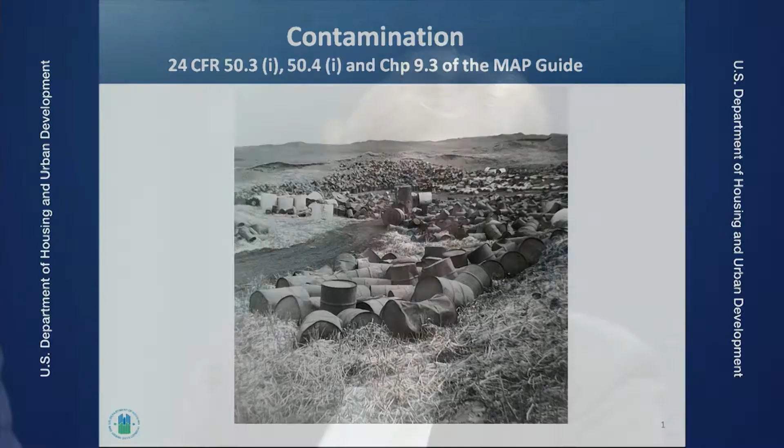Okay, I'm going to provide you with an overview of our contamination policy, Part 50.3(i) and 50.4(i), and Chapter 9 of the MAP Guide. I want to say that this area of environmental review is one of the most technical areas that we have to deal with. It often involves a level of high-end expertise in environmental science and engineering, and it's not something that usually can be addressed by just one person. You normally would have to have a team of people involved in really extensive site contamination issues.

So HUD site contamination policy is that all properties for use in HUD programs be free of hazardous materials, contamination, toxic substances, gases, radioactive substances where the hazard could affect the health and safety of the intended occupants or affect the intended use of the property. And our goal here is to protect the health and safety of people who receive HUD assistance, and the utilization of the property that we plan to use it for. In the multifamily housing context, the contamination standard applies to all housing projects except for 223A7, which is categorically excluded, not subject to.

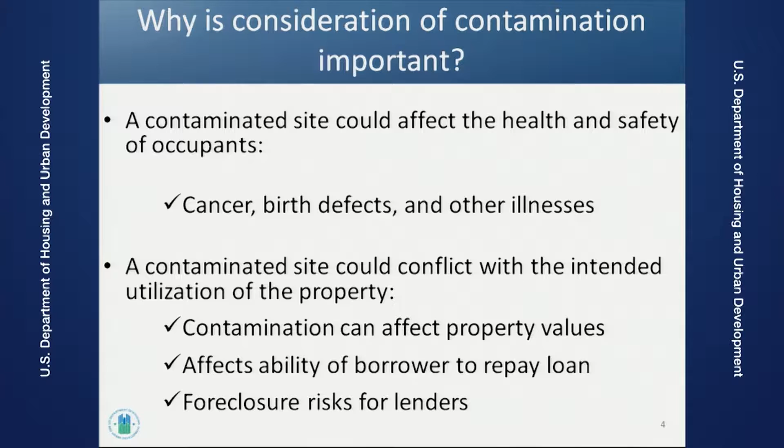Many people often ask us, why do we need to worry about contamination? One of the major reasons is that we need to make sure the occupants and users of HUD assistance are safe. We also need to make sure that the project itself is viable. We want to make sure that site contamination doesn't affect property values, that the borrower's ability to repay a loan isn't affected by a site contamination that wasn't identified before HUD issued the loan. And we want to make sure that HUD doesn't suffer financial risk from foreclosures.

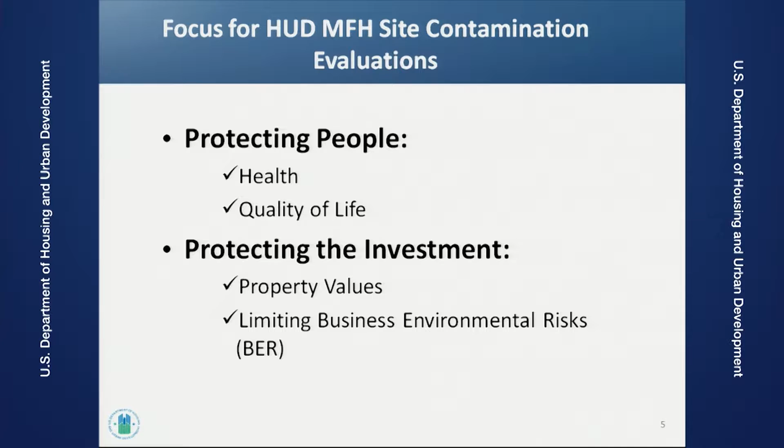So again, the aim of our site contamination policy is to protect people, both their health and quality of life, and to protect the investment, property values, and also limiting business environmental risks to HUD.

Many of you may be familiar with the Love Canal example. This is one of the early cases of extensive site contamination that was covered in the press. I know when I went to work at EPA in the early 1980s, this was a really big deal. In this case, a housing development had been put on a place where the Hooker Chemical Corporation had operated since 1949, and they were producing chemicals, storing the chemicals in containers, and put it in a canal. That's why it's called Love Canal.

The canal was buried, covered over with dirt, and was later leased to the school board, and the housing site was developed on that as well as schools and other infrastructure. As time went on, the occupants of the housing noticed a cancer cluster in the area, and found that the site was contaminated not only with vapors coming up through basements, but actual chemicals were coming up through basements of people's homes.

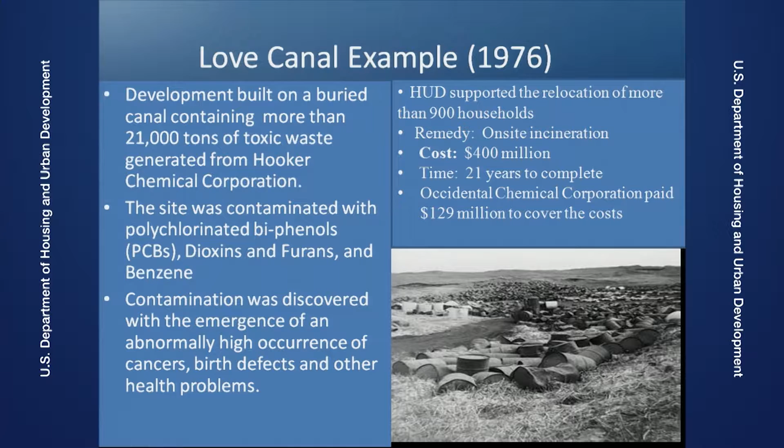The cleanup of this site was extensive. It involved more than 900 families. HUD supported the relocation of those families. The cost of remediation was over $400 million. It took 21 years to complete. And Occidental Chemical Corporation, who bought the property later and was one of the previous owners, paid $129 million to cover the cost. Another example is the Brio Superfund site in Harris County, Texas.

There was a huge litigation, and in 1992 there was a settlement, one of the highest, most costly damage settlements in history, of $207 million that the developer and 6 chemical companies had to pay. EPA was really never able to remediate the site because of the cost of it, and so basically the site is contained, areas of it are capped, it's fenced off, and as you can see, it's now vacant land.

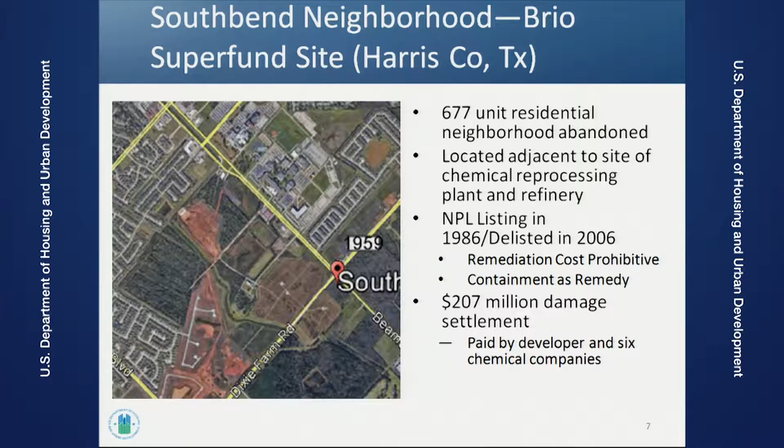Environmental liability is something that comes to mind with site contamination. We have National Environmental Policy Act liability. If you don't comply with site contamination in the proper way and you miss something during the environmental review process, there can be litigation against HUD on the Part 50 review, and HUD would have to go back and improve its environmental review, which is the least of our worries.

If, for example, we don't evaluate a site thoroughly and we happen to allow a project that has site contamination that involves low-income and minority populations, we can end up with a Title VI complaint. And we can also be subject to court-awarded damages for health, loss of income, loss of property values, much like the South Bend neighborhood case.

And then there's cleanup liability. Even if EPA doesn't come after the property owner for cleanup under Superfund, if a property owner acquires a contaminated site without properly evaluating for contamination, and the site is later found to be contaminated, they have to clean it up. So either it just has to sit there, or they have to come up with the money to clean it up, and the cleanup costs typically are in the millions of dollars.

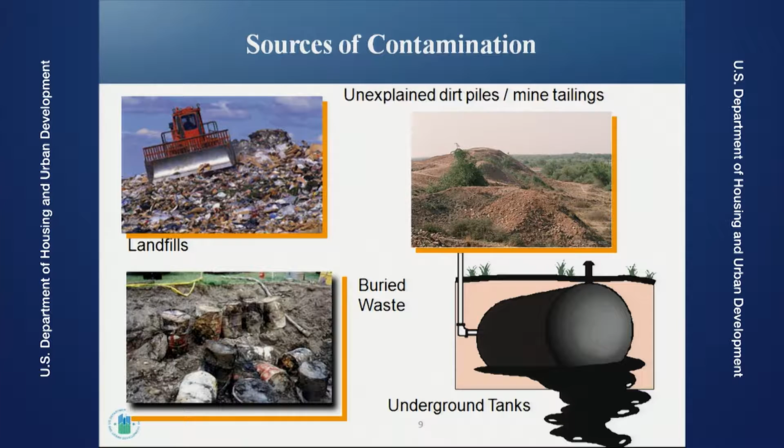So the contamination sources that we are normally concerned with are landfills, buried waste, as in the case of Love Canal. Underground storage tanks are a big source of contamination. Those are largely unseen and underground, so you don't know until you test. The upper right corner is a pile of mine tailings, which are very toxic. The pile itself looks very innocuous, but it's not. So that's something that we have to look for when we're evaluating for site contamination.

Vapor encroachment is one of the biggest issues that we're concerned with in housing. This occurs when there's contamination in land or soil or groundwater beneath housing, and that vaporizes into the houses, into the basements and crawl spaces, and it causes a serious means of exposure to toxic substances.

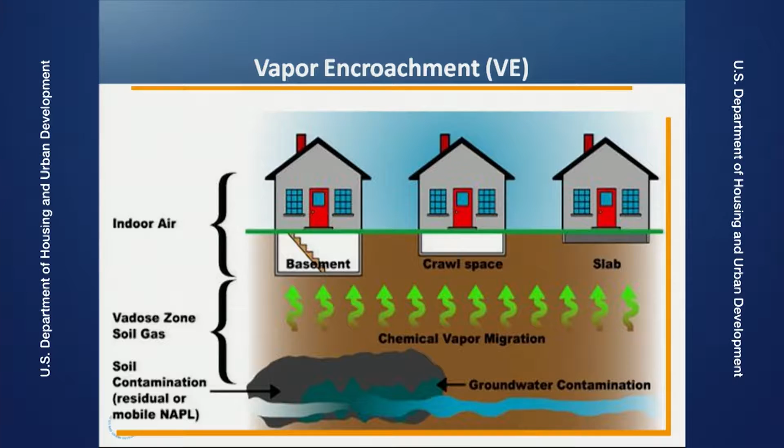The most common sources of vapor intrusion for residential properties are former and present gas stations and dry cleaners. These sometimes seem like small mom and pop shops, but they can pose a big risk for site contamination. We also find that proximity to dumps, landfills, current and former industrial sites, and former manufactured gas plants can also pose contamination risk to residential properties.

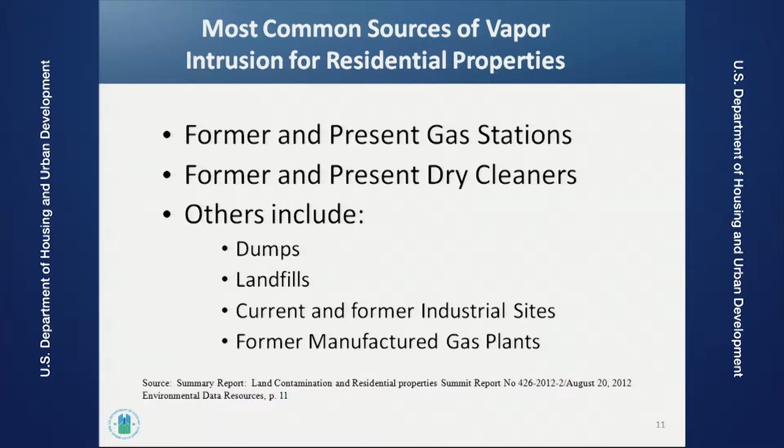So just a little background on the legal and regulatory overview. There are two major laws that govern site contamination at the federal level. The first is the Superfund law, known as the Comprehensive Environmental Response, Compensation, and Liability Act, or CERCLA. It was enacted in 1980 in response largely to site contamination issues like Love Canal. It's the primary program for cleaning up the nation's abandoned contaminated sites. This is where an owner of a property goes bankrupt and the operation is no longer viable. And actions of the Superfund program are triggered by a release or threat of release of hazardous substances, which you will hear more about.

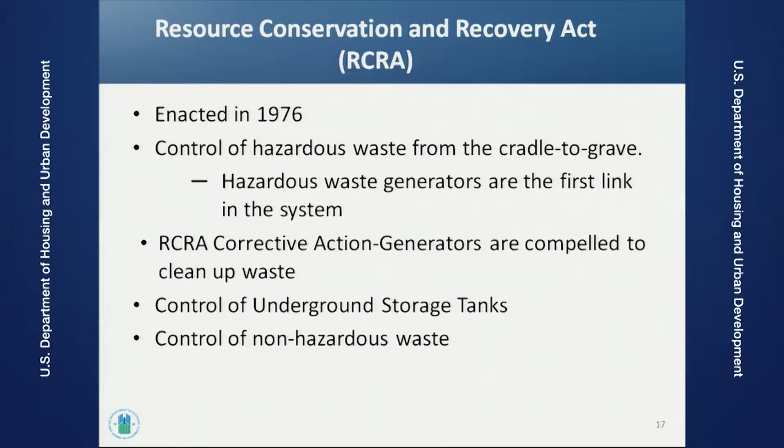One of the things that's very important to keep in mind as we're doing HUD environmental reviews for site contamination is that this always involves regulatory oversight. We use local, state, tribal, and federal laws to govern how we meet our site contamination standards. If a site is contaminated, we have to turn to the local, state, tribal, and federal regulatory oversight agencies. They are the ones who establish the contamination criteria and standards, and they provide for regulatory oversight of any type of cleanup that might be necessary.

HUD has specific requirements in Part 50 for site evaluation. It requires that any proposed site be evaluated to determine if it's in the proximity of dumps, landfills, industrial sites, or other locations that may have contained or have contained contaminated substances. We need to evaluate previous uses of the site if it's a multifamily or non-residential project to ensure there's no evidence of contamination. And we need to apply current techniques used by qualified environmental professionals.

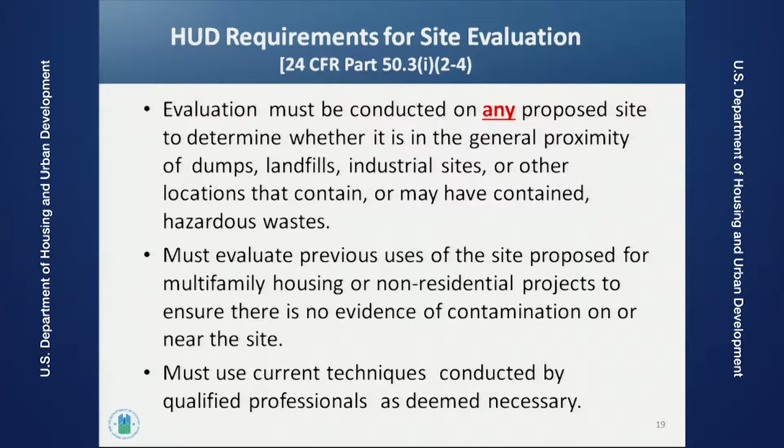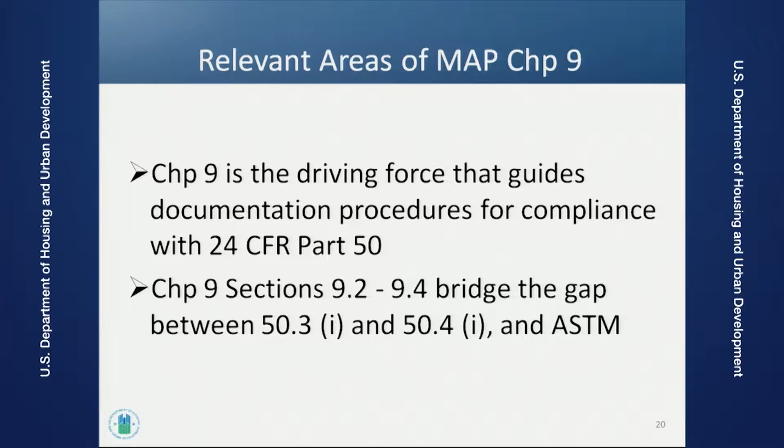Multifamily housing is really fortunate to have the MAP guide in Chapter 9, and in particular, sections 9.2 and 9.4 on site contamination. These sections spell out in detail how to meet HUD site contamination policy. Just kind of an overview of the things that you need to do when you're doing an environmental review and applying the MAP guide requirements. The HUD staff looking at the application must independently review the Phase 1 and Phase 2 studies that will be submitted with the application.

Also, the MAP guide requires that HUD staff conduct a site visit and review the Phase 1 and Phase 2 prior to the site visit to make sure that you can confirm or refute what the applicant has provided in the Phase 1 or Phase 2. When there are issues identified in the initial review process, it's best to bring technical support in early on when concerns are identified. Also, in complying with the MAP guide, you need to ensure proper documentation for environmental review and make sure that all project conditions are identified throughout the process and that they're conveyed in loan closing documentation.

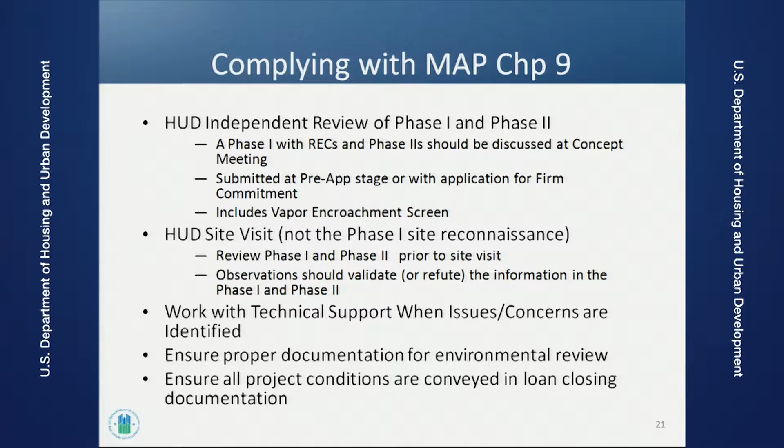So we'll review briefly the steps in reviewing for compliance for contamination. These are the 9 steps. The first is to identify whether there's a likely presence or presence of hazardous substance or petroleum products. The second step is to confirm the presence if you've identified a concern. The third step is the HUD site visit. The fourth step is to complete full site characterization of site contamination if something has been identified. And then we go from there.

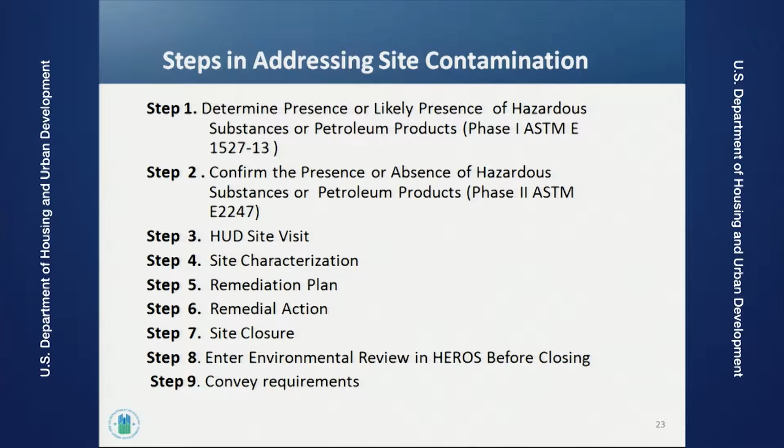If you've confirmed contamination that needs to be remediated, you need to complete a remediation plan, go through the remedial action process, obtain the site closure documentation, and enter your review in HEROS, and then convey the requirements during closing. And we'll go through each of these steps briefly. So step 1 is to determine the presence or likely presence of contamination. I think Dan alluded to this morning, most of the Phase 1s that we see don't elicit a site contamination problem, but there are cases where they do.

So we'll walk through all those steps. So again, the ASTM Phase 1 environmental site assessment is the first thing that we look at. The ASTM standard requires that this be prepared by a qualified environmental professional. This study does not involve environmental sampling at all. We're simply looking at records, and the EP conducts interviews and conducts a site visit.

One thing to note, and I think this has been pointed out earlier, that the Phase 1 ASTM is not an environmental assessment, so please don't get those confused. So really what we're after here is to determine whether there's the presence or likely presence of hazardous substances or petroleum products, and if so, this is called a recognized environmental condition.

The use of the Phase 1 for HUD site contamination evaluations is a little bit different than it normally would be when someone is using them to become eligible for the CERCLA landowner liability protections. While those liability protections are important certainly for the property owner and for the lender, again, if HUD holds title to the property, then we aren't able to use those liability protections. We're more interested in complying with 24 CFR Part 50.3(i), our site contamination standard, and limiting environmental risk. So our focus is a bit different.

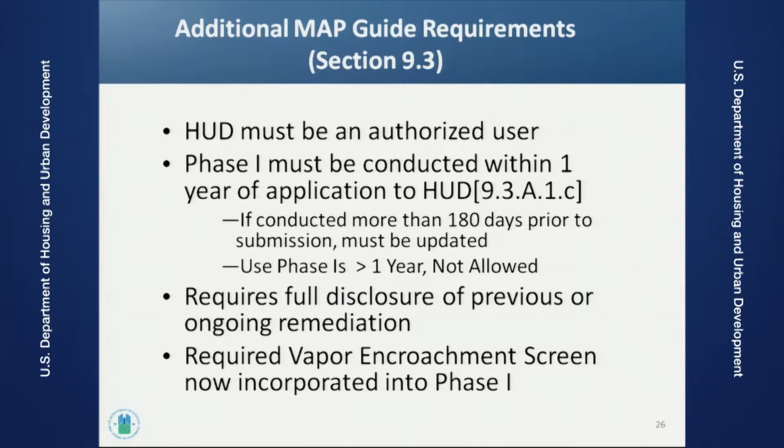This is an outline of the Phase 1 contents. It includes a summary, introduction, the user-provided information, records review, site reconnaissance, interviews, and then the evaluations that include the findings, opinions, and conclusion. This is where the environmental professional talks about any RECs that were identified and the data gaps that might have prevented the EP from finding RECs. It can also include non-scope items, although we really prefer to see those in a separate report, and then appendices.

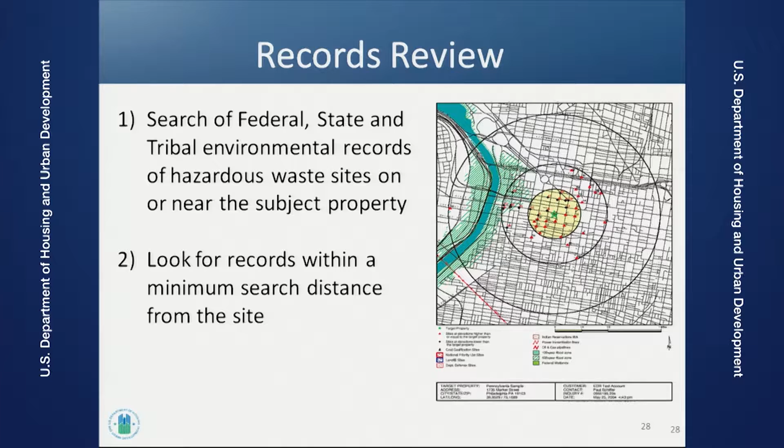The first thing that the EP does when they're conducting a Phase 1 is to conduct a records review, and this is really looking at all the state, federal, and tribal environmental records. You'll see brownfield sites, Superfund sites, RCRA sites. It just includes a lot of information in the databases that are available for conducting these kinds of searches. And then once those sites are identified, we look at the search distance from the property to the site. The All Appropriate Inquiry Rule, which drives the ASTM standards, details minimum search distance requirements for each property. This is a summary of those.

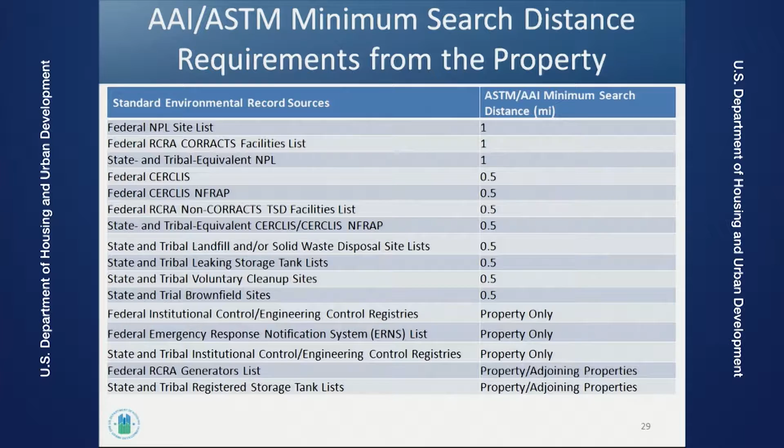For the most part, we want to look at any Superfund site or RCRA corrective action site that's within 1 mile of the property. We look at whether the property has institutional controls or engineering controls, which are indicative of a previous cleanup at the site, and we're really only looking at the property that we're concerned with. And any kind of activity that involved an emergency response notification, we look at that specifically to the property. If there's a RCRA generator near the property, we consider the property itself and the adjoining property, and registered storage tanks on the property or adjacent to the property. For everything else, we're looking at half a mile out from the property.

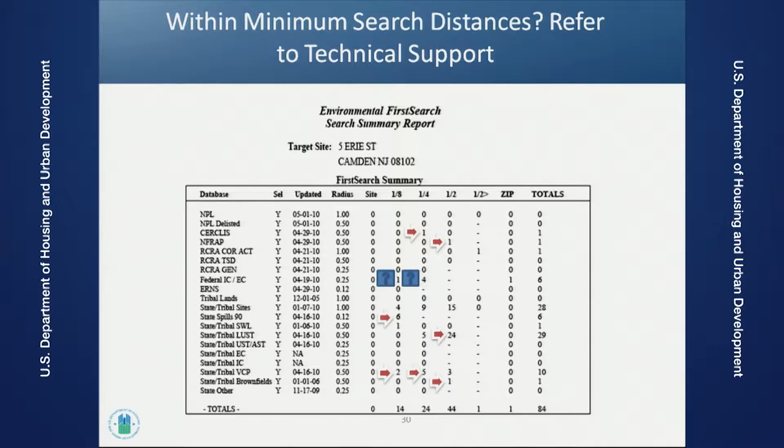There are things called activity and use limitations in the ASTM standard. These can be really important. They are indicative of a past or present release of hazardous substance to the property. There might be land use controls to restrict access to contaminated areas. There might be engineering controls to prevent exposure to on-site contamination. And there might be environmental liens, where that's like any other lien: somebody wants the owner to pay for a previous environmental cleanup.

So you need to be mindful of those kinds of issues that come up. And these are found in recorded titles, deeds, and judicial records. One of the things that the ASTM standard mentions is that looking for these kinds of records and issues is not always automatically in the scope of the environmental professional for the Phase 1, but they're very important. So I hope that multifamily has a way of looking for these. It might be done through the title search, I'm not sure, but it's important to look for these kinds of issues.

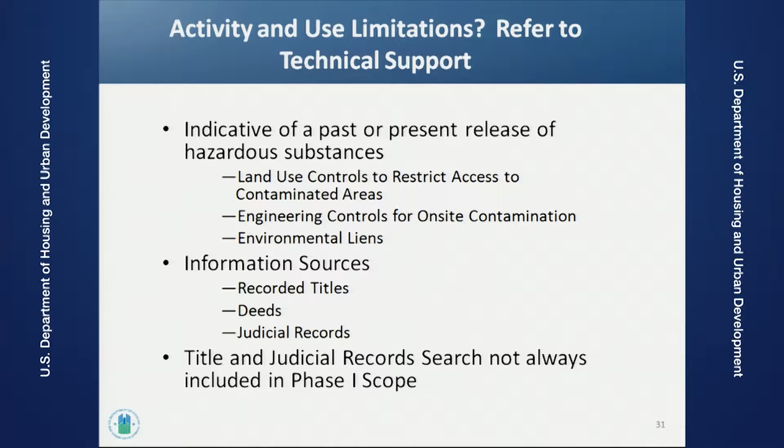Historical uses is another thing that's very important and is mentioned in our site contamination policy. People need to look back at what the site was used for, and the reason we do that is because sometimes people may not know when they're buying a property that it was the site of a petroleum tank farm, or had there been a photo lab there, or a gas station, or dry cleaner. So we want to look back at the records to see what was there before.

And some of the records that we typically look at are Sanborn fire insurance maps, property tax records, city directories, chain of title, aerial photographs. Google Earth has a historic function on it, and you can scroll back and look at time. Some areas have this where you can look back 20 or 30 years on Google Earth, but you need to look at building and zoning and planning records and other sources.

So what we're typically looking for when we look at historic uses, again, are the present and former gas stations and dry cleaners, landfills, former industrial facilities, underground heating tanks, naturally occurring asbestos. One of the things that should be of interest for housing is whether a property has been used as a meth lab, because that can really leave some very nasty contamination on site. We look at petroleum refining and storage facilities.

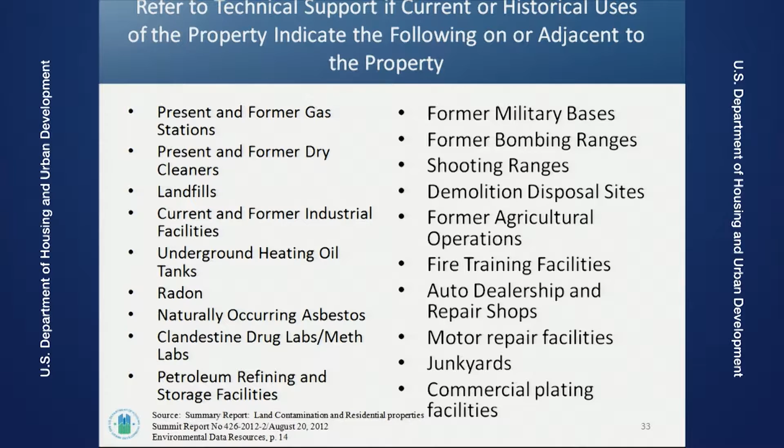We also need to look at whether there have been former military bases or bombing ranges. We've had a couple of cases here at HUD where we found properties located on formerly used defense sites, just something that we hadn't really been concerned with before or seen before, but that's been an issue of late. You need to look for former agricultural operations where pesticides might have been used. Auto dealerships and repair shops could be an important use that contaminated the property. So if you see any of these things, if you're doing the initial review on the Phase 1, then you need to flag that to talk to technical support about it.

So the environmental professional will also conduct interviews with past and present owners, occupants, and neighbors, and they'll also speak to state and government or local officials. You need to refer any Phase 1 to technical support if the interviews elicit that the property has been previously contaminated, had any violations or spills or releases, if there are any active or abandoned storage tanks or leaking underground storage tanks, any kind of illegal dumping, or just anything that an interviewee might identify that could indicate there's been contamination to the property.

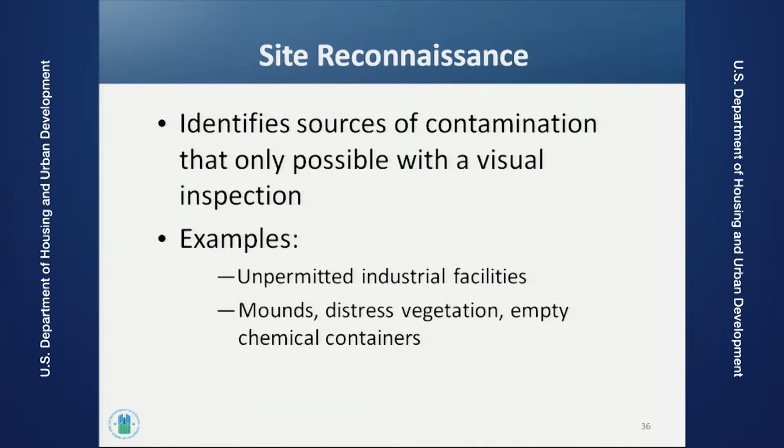The Phase 1 environmental site assessment also requires site reconnaissance. And the reason a site visit is really necessary, there are just some things that don't show up in government records. And an interviewee might not tell you about things, so things that you can't see from the other sources are things like unpermitted industrial facilities. Those are not going to show up in government records. Mounds, distressed vegetation, and empty chemical containers are things that you can't see any other way than to go on site.

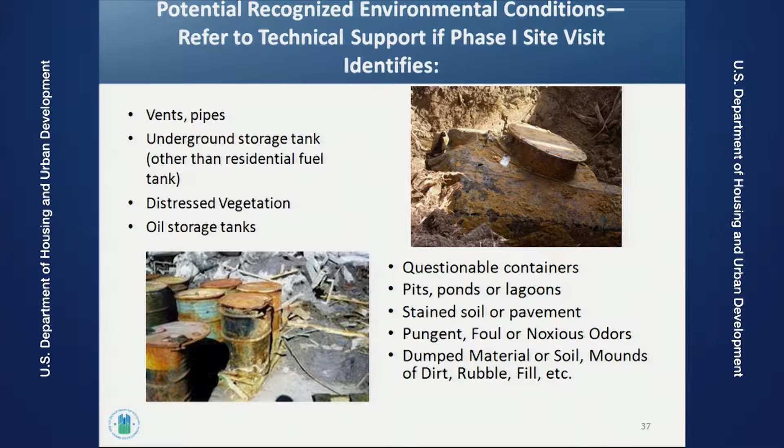So just in looking at the phase one, if you're not satisfied with the results, or you have questions, or something doesn't make sense, refer to technical support or ask your program environmental clearance officer. You need to ask questions. When you're reviewing these things, you're looking after HUD's best interests, you're looking after the best interests of the occupants of the property. And it's much better to ask questions now than to find out that something happened later.

So the second step, if the phase one indicates a REC, or if for some reason HUD looks at the phase one and maybe there's no REC, but there's something that concerns us, HUD can require an ASTM phase two. This is actually where we go out and sample the property to determine whether a REC is present or not. And normally, if a REC has been identified in a phase one, the applicant would automatically submit a phase two. And this should be submitted at pre-app, or if there is no pre-app, it should be submitted at firm. I would say that any application that comes in with a phase two should be referred to technical support.

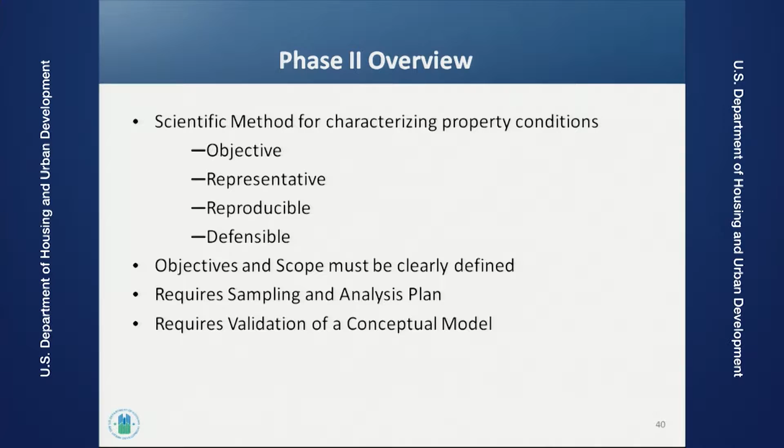Phase twos are scientifically based evaluations of site contamination. They're objective, representative, reproducible, and defensible. They have an objective and scope. They have a sampling and analysis plan, and they have to validate a conceptual model. So it's not a casual thing. This is a very rigid process that is necessary for phase two.

So if you get through the phase two process, it can either rule out site contamination. If you thought something was there and it turned out it wasn't, then that's good. But again, you need to confirm that with technical support. On the other hand, if the phase two does confirm the presence of site contamination, then you need to go on to the next steps.

Sorry, I skipped a step myself. So you've got the phase one and phase two. You need to do this HUD site visit. This is different than the phase one site visit. This is where HUD staff actually go to the site and confirm the results of the phase one and phase two. You need to look at the project site and neighboring properties and the structures and take notes and compare and contrast with the phase one and phase two.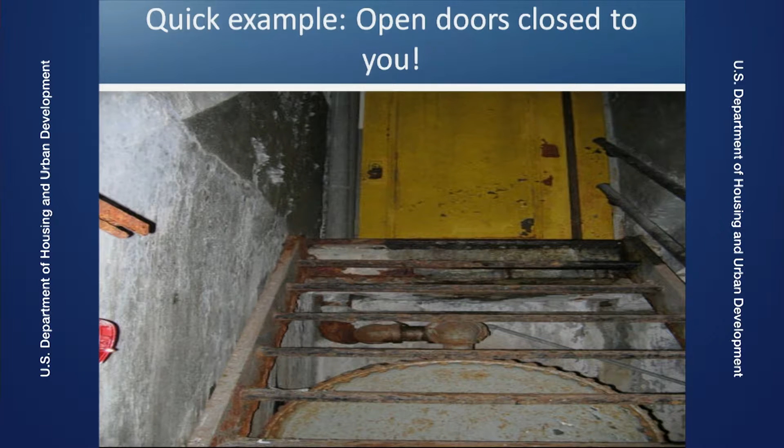When you're on a site visit, you need to make sure that you go through the whole site. If the doors are closed, you might want to open them. If there's a bunch of stuff laying around that doesn't smell good or kind of makes you feel uncomfortable, you need to take note of that, ask some questions of what was in those containers, when did they spill, how long has that spill been there, and could what spilled out possibly have gone down the drain. That drain there is a source of underground contamination. It could be in the groundwater underneath the property.

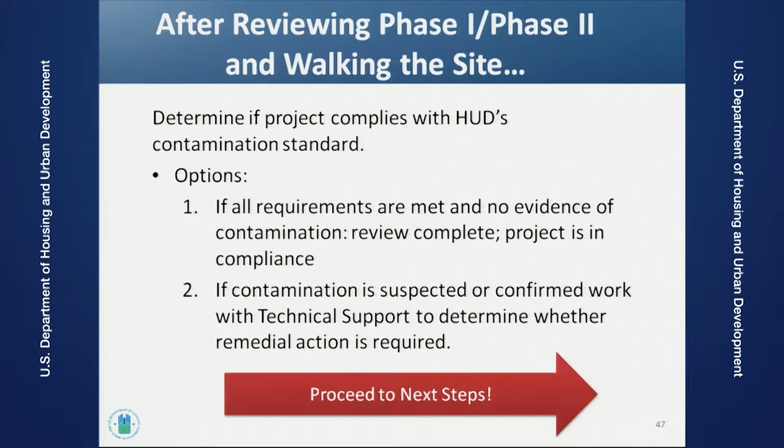So after you've reviewed the phase one and phase two and walked the site, you need to determine if the project complies with the site contamination standards. If all the requirements are met, the phase one didn't identify a problem, the phase two was conducted and didn't confirm contamination, then compliance is complete. But if contamination was confirmed, then you need to go on to the next steps. Again, this is the point at which things can get very technical and complicated. Technical support would always need to be involved in this stage.

So the fourth step is completing the site characterization report. Under the phase two, sampling was done in areas where, if there was contamination, it would be most likely to occur. Site characterization is where you go out and look at the whole site and determine the nature, extent, and magnitude of the contamination. You want to know how far the contamination spread out on the surface of the property and how deep it goes.

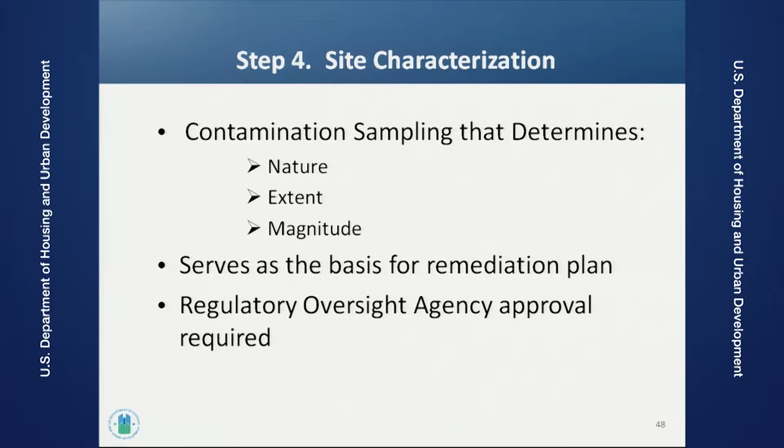The site characterization report, again, is very technical. It uses scientific methodology, and it serves as the basis for the remediation plan. This is where the regulatory oversight agency has to be involved in this process. So normally what would happen is the lender would pay a contractor to do the site characterization, but then you would need to make sure that the regulatory oversight agency approves the site characterization report.

The site characterization report is fundamental for preparing the remediation plan, which is the next step. This talks about the area subject to remediation, the cleanup remedy, the schedule, and provides a firm cost estimate for remediation. As I mentioned earlier, remediation can be very expensive. I mean, even for an underground storage tank, you're talking about possibly $500,000, and then some of the examples we've seen, this remediation cost goes into the millions.

So it's important to have a good cost estimate so you can see if the project is actually viable given the remediation cost. Again, the remediation plan requires regulatory oversight agency approval. Normally what happens is that to get the kind of approvals that HUD needs, the lender needs to make sure the developer enrolls the project in a state voluntary cleanup program or brownfields program, so the state will give the necessary attention and approvals throughout the whole process.

The sixth step is the remedial action itself. I think Stefan alluded to this earlier. There are two types of remedial actions. The first involves complete removal of contaminants. That's where you're removing the contamination to levels below the standards that the state has set. And no further action is needed once those contaminants have been removed.

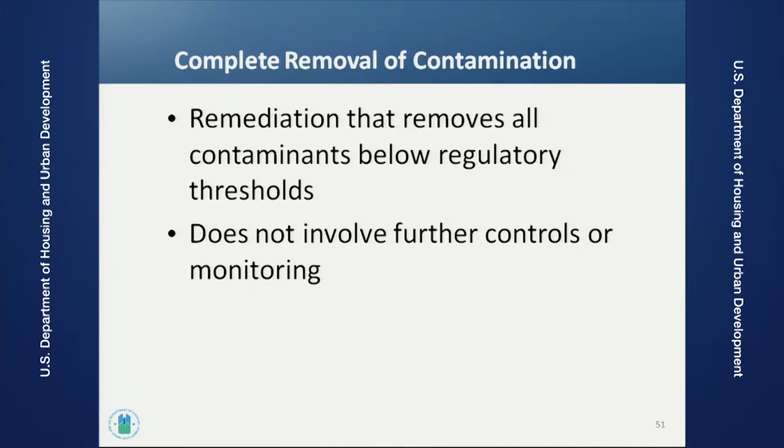Incomplete removal of contamination is called risk-based corrective action, and this allows some contamination to remain on site. The reason we would do that is because the cleanup costs are infeasible, and there are ways to control exposure to contamination that will actually work. This is not something that we take casually, and it requires justification. And again, this is something that the regulatory oversight agency must be involved in.

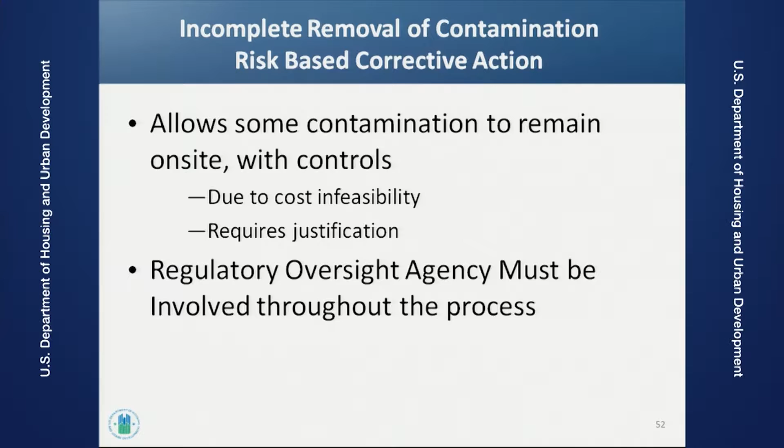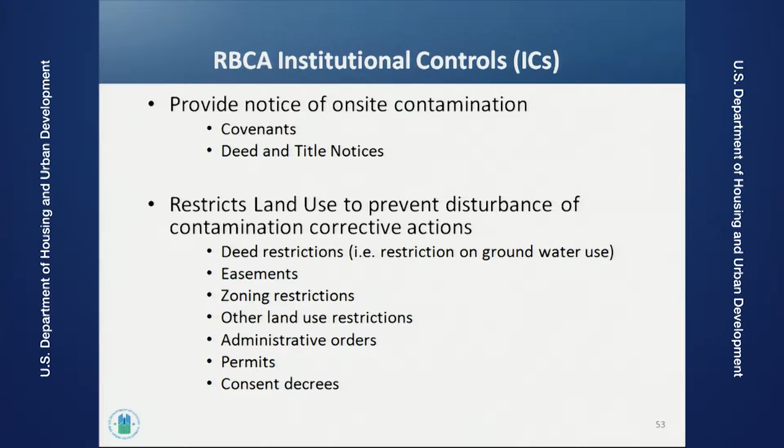Risk-based corrective actions can include institutional controls, and they really have a twofold purpose: to provide notice to current and future owners of on-site contamination, and also to restrict the land use to make sure that the corrective actions that have been put in place aren't disturbed. So the notices can be conveyed through covenants, deeds, and title notices, and the land use restrictions can be conveyed through deed restrictions, easements, zoning regulations, and other land use restrictions, permits, and that type of thing.

Risk-based corrective actions can also include engineering controls, and these prevent the remaining contamination that's on site from being accessible to people. So it prevents exposure to the contamination. These can include caps, fences, slurry walls, poured-on vapor barriers, which is what we use when we have a radon issue, and active and passive venting systems, also used for radon. And then the engineering controls also can include monitoring to ensure controls are working.

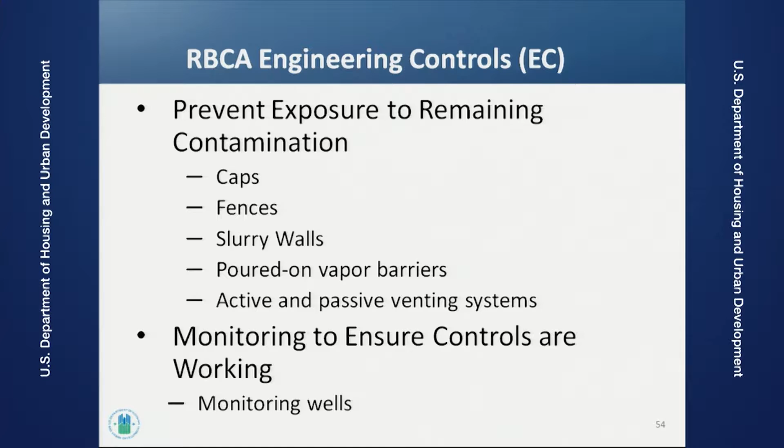So if you see a monitoring well in some of the contamination information you have, that's an indication that there's contamination on site, and there's monitoring there to see if those controls are intact. And then also associated with any kind of risk-based corrective action, you're going to have operation and maintenance over the long term. Those can include monitoring wells, making sure caps and ventilation systems are maintained. You have to make sure that restrictions on groundwater use are maintained and notifications to protect workers and residents to avoid disturbance of the engineering controls.

Again, the O&M plan has to be approved by the Regulatory Oversight Agency, and as HUD, and I'm not exactly sure where multifamily does this in the process, but you need to make sure that there's funding in place for making sure the O&M plan works out into the future.

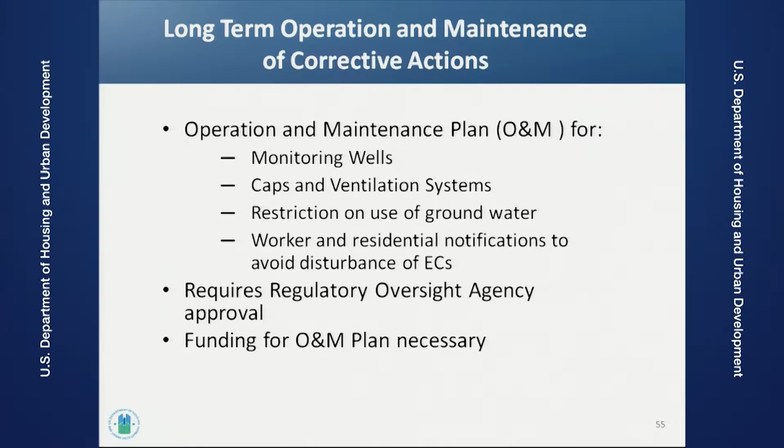So finally, for all projects that require remedial action, the Regulatory Oversight Agency needs to issue a written site closure notice, documentation after the remedial action is complete. And this means that the site is safe for its intended use. Because at HUD, we don't really have the expertise to make that determination ourselves. Again, it's the Regulatory Oversight Agency that has to help us with this.

And that is how we comply with the site contamination standard, is through the no further action letter when a site has been remediated. This entire process, again, must be obtained prior to initial endorsement and final endorsement, and certainly before initial occupancy. So once you've completed all the remedial action steps and you have your site closure letters, you finalize the review in HEROS before making the firm commitment.

I can't stress this enough. This should be done before the firm commitment. And you consider all the studies that you have available. And if the project can't be remediated, or if there's a concern about long-term operation and maintenance of the engineering controls, then you need to think about whether you want to go forward with the project or not.

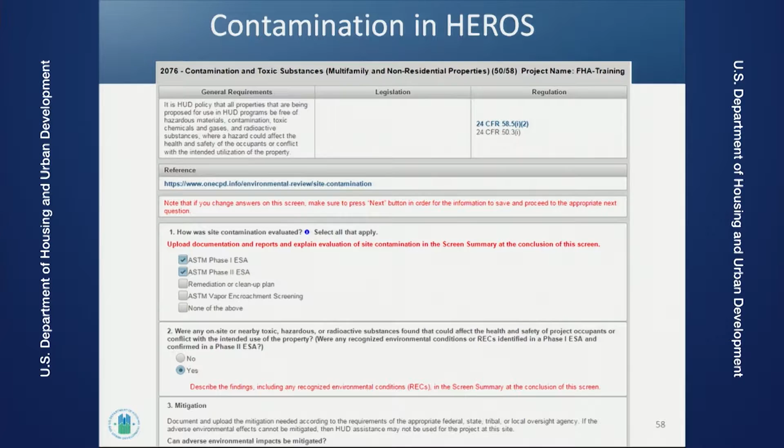When you complete the environmental review in HEROS, make sure that you append all the supporting documentation. It's really important to include these documents because they're very hard to find if you want to go back later and don't have them. This is the contamination screen in HEROS. And the final step is to convey requirements.

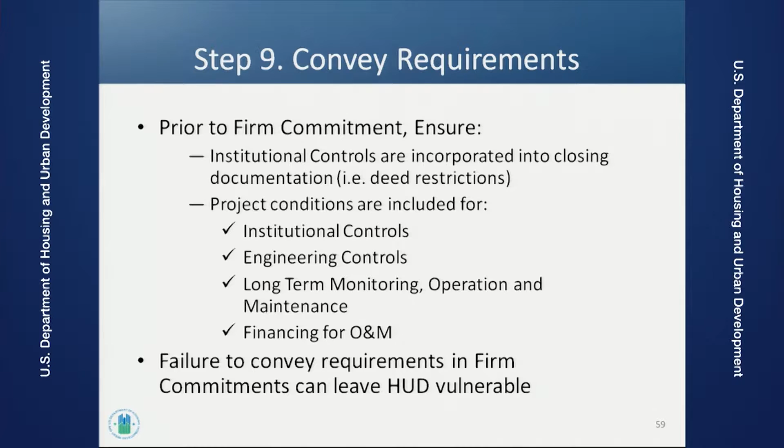Once you've finished with the environmental review, you need to make sure that you carry forward all the requirements of the site contamination evaluation. If there's a risk-based corrective action, you need to make sure the institutional controls are incorporated in closing documentation. For example, the deeds, you need to make sure that the institutional controls are incorporated into the deeds, and make sure that any kind of requirement, engineering controls, long-term monitoring, and financing are included in the environmental review and conveyed to the borrower. Failure to convey these requirements can really leave HUD in a vulnerable position.

Multifamily Housing has produced this really great brochure on site contamination, choosing an environmentally safe site, and it's online at these links. So with that, over to me.

Yes. And I will just briefly mention that if you are looking at contamination and there's an O&M plan with costs involved, those costs may not be in any historical records, but typically it would be handled by the appraiser who's looking at the expense analysis. Perhaps an underwriter will be undertaking that as well, but you would want to make sure that going forward it's allocated in the expenses so that it affects NOI and our collateral.

So it looks like we do have a couple of questions, Barbara, for you on the contamination. Who is the responsible party for cleanup cost? The current owner at the time the contamination was discovered, or the previous owner who caused the contamination? It can be both. It can be present owners, past owners, and even if you're a past owner and you didn't cause the contamination, or you're a present owner and you didn't cause the contamination, you can still be held liable for cleanup cost under Superfund.

One of the big purposes of the Phase 1 environmental site assessment is to provide the new owner with the innocent landowner liability protections. And so as long as your due diligence has been done prior to purchasing of the property, then you would not be held responsible if it is later found to be contaminated.

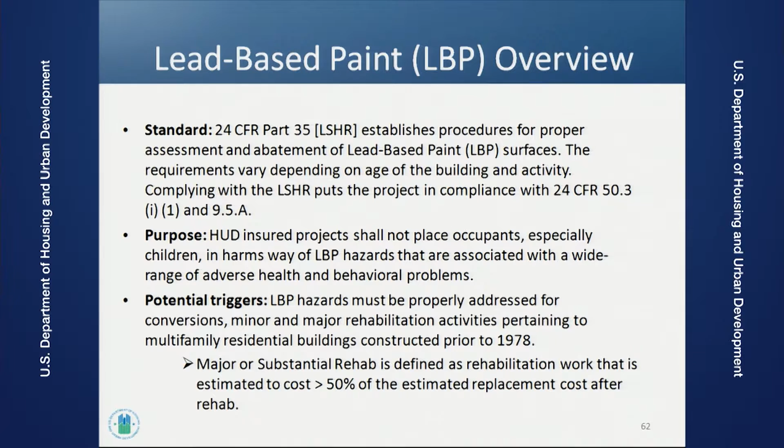Circling back around, we have more discussion about pre-78 structures. The following criteria are exceptions to Part 35. The project is proposed for demolition, provided the property will remain unoccupied until demolition. And I'll take this opportunity to mention that this is demolition that's generally non-mortgageable, where you're demolishing the building to get to the vacant land. We're not talking about minor demolition, demolishing a wall in a sub-rehab.

Another exception is the housing is designed or designated exclusively for elderly or persons with disabilities, unless a child of less than 6 years of age resides or is expected to reside there. So if you're out there looking at refinance of a 202, always be careful to ask whether there's a child under 6 years of age who is residing there. It's not something that people like to talk about, but as soon as you see it, it throws a red flag.

Zero-bedroom dwelling units, also known as studios or efficiencies, if the entire project is made up exclusively of zero-bedroom dwelling units, and applications for insurance in connection with refinancing transactions where HUD's procedures do not require an appraisal. In other words, categorically excluded 223(a)(7)s. I'll also mention, because we talked about it, abatement equals removal or replacement, and encapsulation and enclosure with HUD-approved exceptions. And some of these exceptions also are architectural in nature or historic preservation.

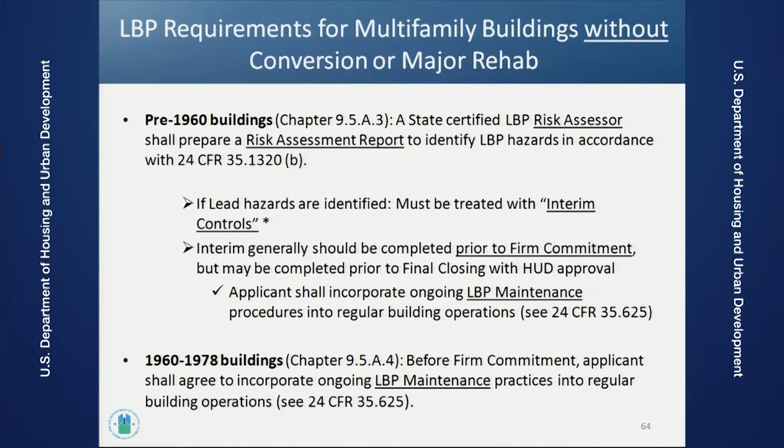Again, here, generally, abatement is achieved through paint removal or component replacement. We can, at our discretion, approve a permanent encapsulation or enclosure and incorporate it into the ongoing lead-based paint maintenance if the removal and component replacements are not practicable. Again, start thinking historical or architectural concerns. I have written in my notes paint removal by wet scraping, wet sanding, some sort of a stripper remover for non-fixture objects, and generally done with a HEPA-filtered local exhaust attachment.

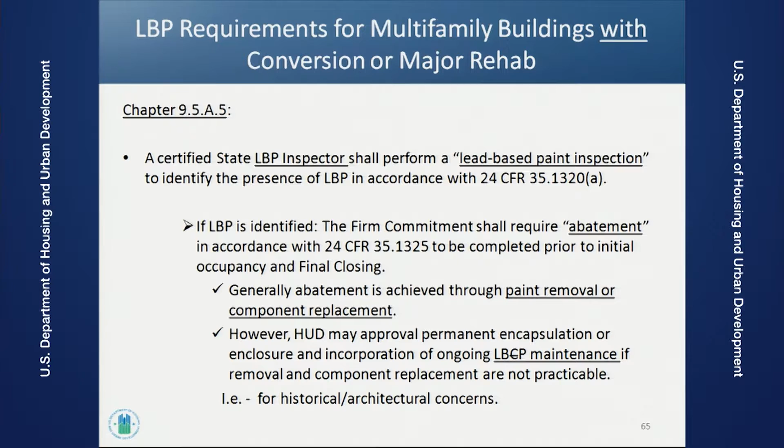Lessors or owners must comply with the lead disclosure rule. Anybody who's ever bought a single-family home has had to go through that with your local broker, realtor. The cost of abatement or hazard control work may be included in the proposed mortgage loan with HUD approval. So it is a mortgageable cost. Moving on to asbestos, handled again in Chapter 9, Section 9.5. This is B.

State agencies license contractors for proper asbestos abatement procedures in accordance with OSHA and ASTM standards. The purpose: asbestos-containing building materials must be removed, and Stefan talked about this morning, must be, not shall, but must be removed for most HUD-insured projects to protect the health and safety of occupants and not conflict with the intended utilization of the property. Here we get potential triggers. You're likely to see this in HUD-insured demolition and rehab projects.

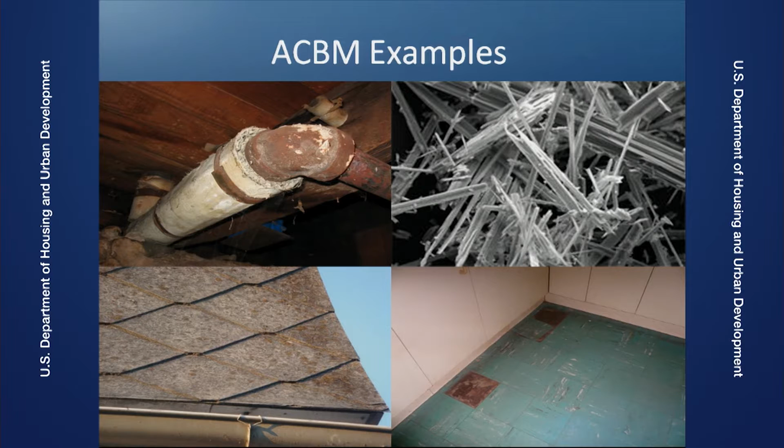We get into the health impacts. Asbestos fibers are small, weightless, strong, and fire retardant. They may remain in the air for many hours after they are released from asbestos-containing building materials. And again, we get into asbestosis or mesothelioma. We're talking about forms of cancer. Unregulated building demolition is a major source of asbestos-containing materials.

I live in New York. I'm walking on the sidewalk. I can smell building demolition, and I'm wondering what I'm inhaling. And sometimes I just wish I had an air filter in place.

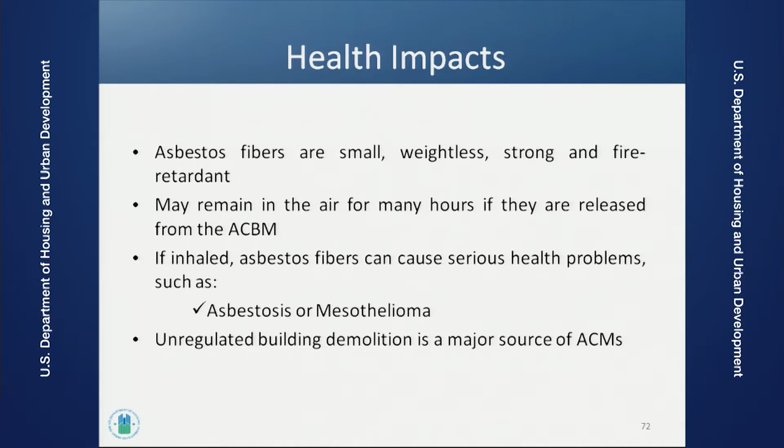For any structure built before 1978 to be completely demolished, a comprehensive building asbestos survey is required. The survey has to be performed by a qualified asbestos inspector. It's pursuant to the pre-construction survey requirements of ASTM E2356-10, Standard Practice for Comprehensive Building Asbestos Surveys. You'll notice that 2356 is the number, 10 means that it's been around since 2010. So if in the next couple of years we come up with an updated standard, don't just refer to this in the MAP guide. We always work off of the most current standard.

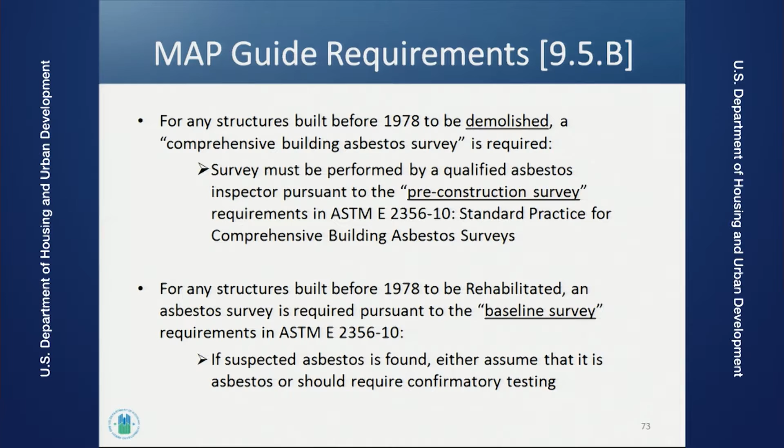For structures built before 1978 to be rehabbed, an asbestos survey is required pursuant to the baseline survey requirements of that same ASTM requirement. In this case, it's less intrusive. You're not breaking down walls to get to things, so you have a level of risk. Suspected asbestos is found. You can test it, and if you don't test it, you have to presume that it is asbestos, and without confirmatory testing, it's treated just as if it is, and it shows up in the O&M plan. They make no real difference. If it gets surveyed later on and it is, then your due diligence is complete because you're not overreacting. You're taking prudent precautions.

Here's our chart. Structure built prior to 1978. Yes, it's the proposed project, and if it's for demolition, you need the comprehensive building survey. If it's for rehab, you need the baseline asbestos survey requirements. And you're either going to assume that it is asbestos or you require that it be confirmed through testing.

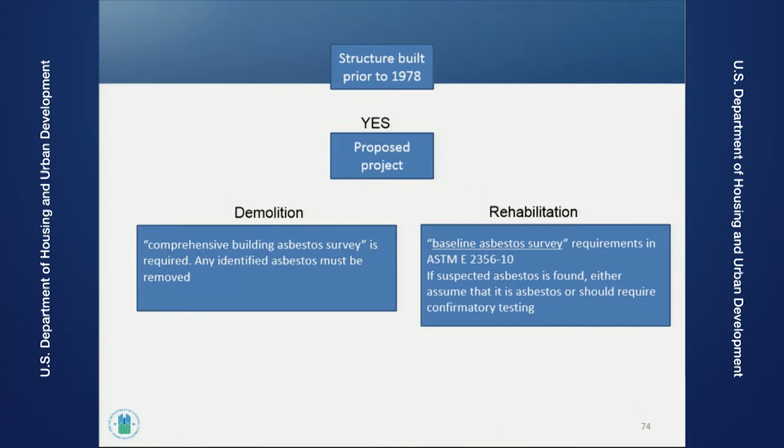Now we get into some definitions. For rehab projects, friable or damaged asbestos must be removed. In the 2011 MAP guide, that was only recommended. I'll give you a working definition. Friable asbestos-containing building materials can be pulverized or crumbled by mere hand pressure that, when disturbed, can release toxic fibers into the air.

If the asbestos is not friable or damaged, HUD strongly recommends that it be encapsulated and incorporated into an O&M plan. I would much rather, if it's in de minimis levels, see it removed. And as I mentioned before in that example, take a look at the costs versus the risks. You may feel that it's better to remove it and not ever have to worry about it again. You get a certification that it's been removed and you've taken care of that liability.

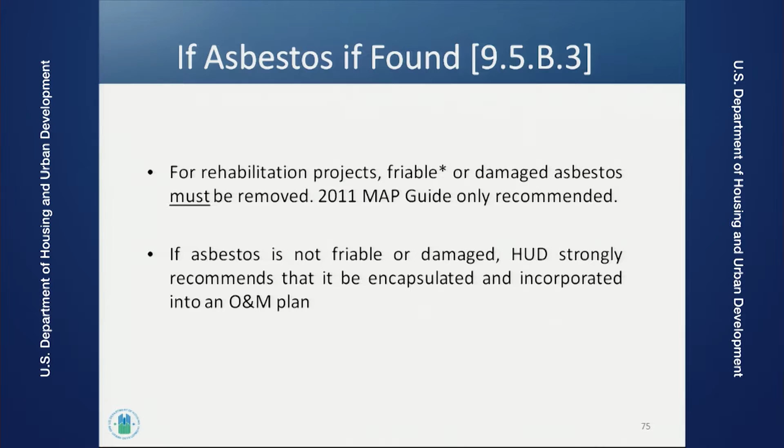The O&M plan will inspect periodically and properly abate when required. Asbestos abatement is dismantle or remove, encapsulate, enclose, or repair. MAP guide and timing requirements. An asbestos survey must be submitted with the application for a firm commitment as part of the environmental report or tailored phase 1. Tailored meaning when the environmental report is incorporated into the phase 1.

Again, if that survey identifies asbestos or asbestos is assumed, HUD will special condition the firm commitment on an appropriate mix of asbestos abatement and an O&M plan. Unless structures will be completely demolished, the cost of any asbestos abatement may be included in the proposed mortgage loan. So circling back on that, we don't pay for demolition costs, so we wouldn't pay for asbestos removal on a building to be demolished.

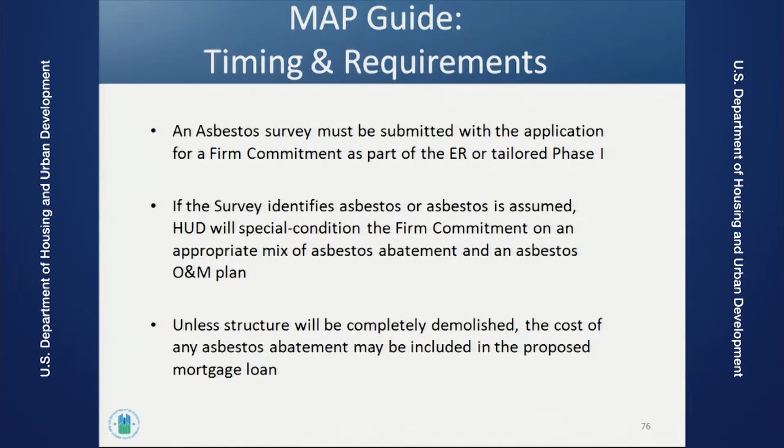Some quick takeaways. An ASTM certifiable pre-construction asbestos survey report is a requirement for demolition projects for buildings older than 1978. An ASTM certifiable baseline asbestos survey report is required for rehab projects for buildings older than 1978, and a survey must be made part of the environmental report or a tailored phase 1. If abatement is required, the firm shall so condition.

This survey is a requirement for all multifamily programs except for the 223A7. And I have an asterisk: unless there's minor repair, rehab, or an O&M plan does not exist. And I'm wondering if that's a typo since I inherited this slide.

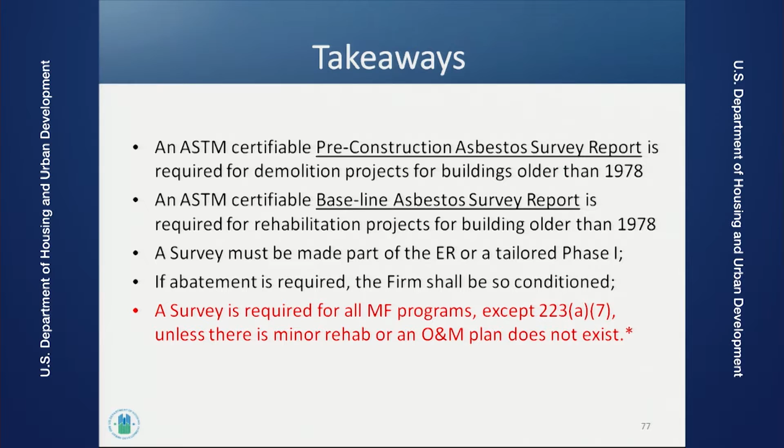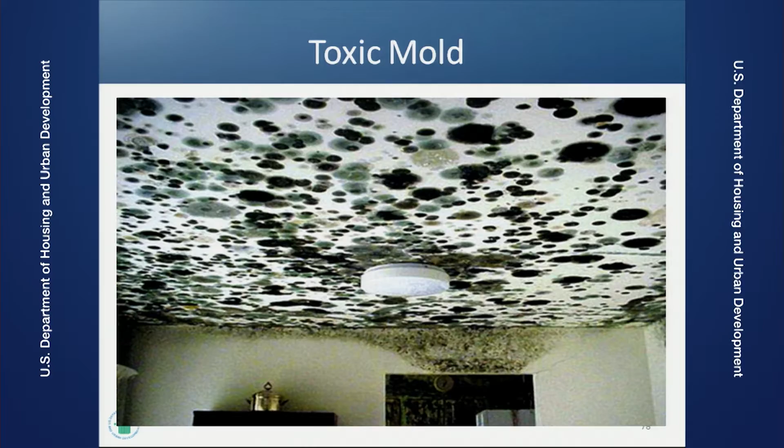We're coming back to Barbara Britton, who's going to be handling explosive and flammable operations. Barbara, you all set? Here's your clicker. Keep the questions coming also; there are questions for Rick. We have questions already. Not shy.

Who is responsible for liability, the agency or the HUD housing team member? I think I would send this over to one of our lawyers. I don't really know what our personal liability is, acting on behalf of the government and trying to provide safeguards for the public and the residents. So if we can put that question aside, we'll hold that one, we will get back to you on it. Are there any other questions?

Can we include lead-based paint inspections in the annual inspection in the regulatory agreement? Ooh, these are underwriter questions.

I'm an appraiser by training, so I'm going to punt on this one as well. Perhaps Dan can answer it. Dan, who has forgotten more about our regulatory agreement than I'll ever know. We'll get back to you on that as well. Other questions? Rick? Sure. Rick, yes.

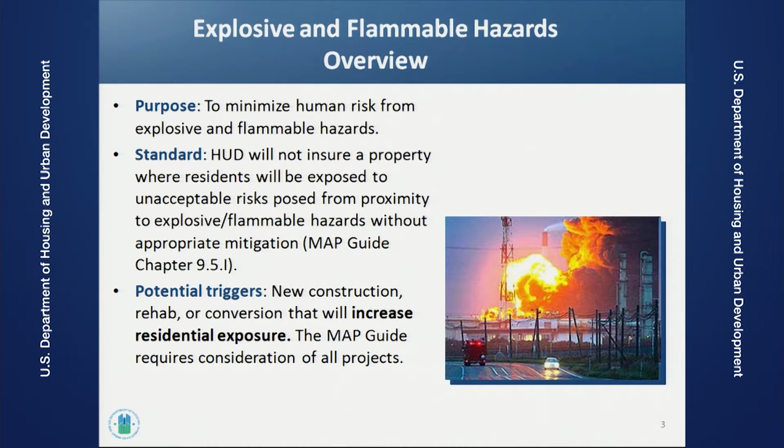Our standard is that HUD will not insure property where residents are at unacceptable risk due to proximity to above-ground storage tanks with these types of hazards without the proper mitigation. This applies to all new construction, rehab, or conversion that will increase residential exposure. The MAP guide itself requires consideration of these types of impacts for all of its projects.

In defining what the hazards are, we're really looking at any stationary container which stores, handles, or processes hazardous substances that are prone to explosion or fire. And the substances that we're talking about are petroleum products and chemicals that can produce blast overpressure and thermal radiation at levels that exceed our safety standards. And we have safety standards for explosion risk that apply to both people and buildings, and thermal radiation from fire that applies to people.

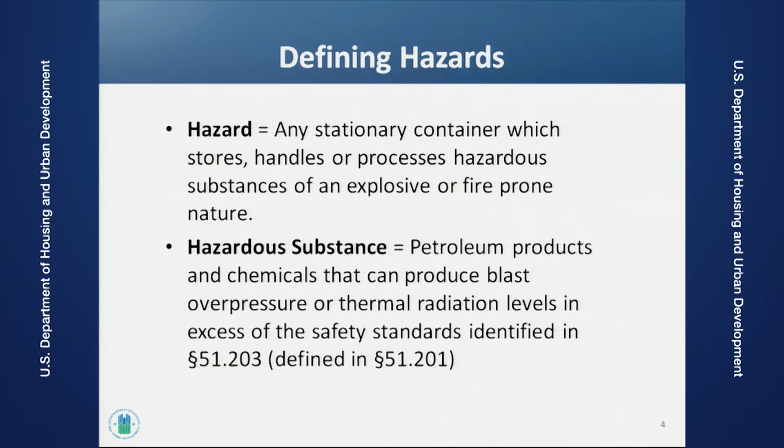We're all familiar with what types of impacts explosions can cause. Thermal radiation, actually when I came to HUD, I was a little bit surprised to find out about this, but fires from above-ground storage tanks can result in such high heat that it can result in third-degree burns to people nearby within a matter of minutes. So it's a very dangerous situation when these things occur.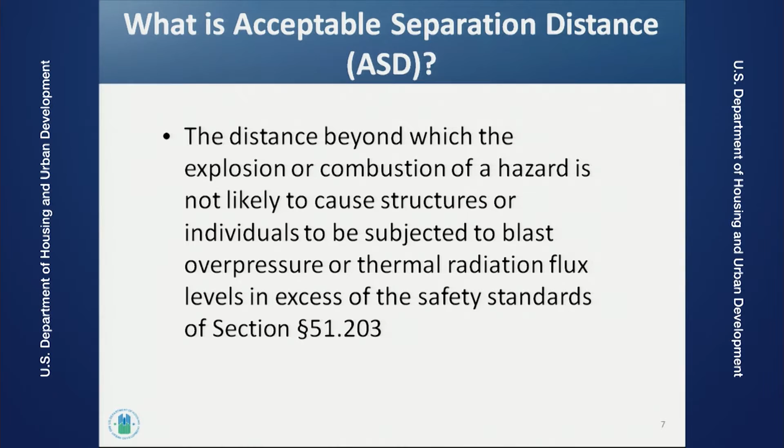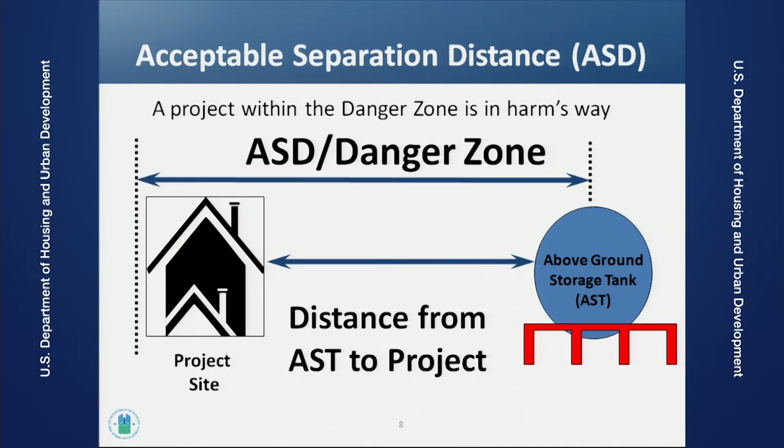What we do at HUD to determine where the safe area is within proximity to above-ground storage tanks is we determine the distance beyond which the explosion or fire hazard is not likely to cause impacts to structures or individuals. And so we call this the acceptable separation distance. So as you can see in this diagram, you have to calculate the distance from the above-ground storage tank and calculate the acceptable separation distance and make sure that the property's outside that distance. Otherwise, it's in the danger zone, and the people and the structures there could be in harm's way.

There are 5 steps to evaluating these kinds of hazards. First, you need to determine if you've got the kind of project that the regulations apply to. Then you determine if there are above-ground storage tanks within a 1-mile radius of the property. If you find that there are, you need to collect data on any of the above-ground storage tanks within that radius. The 4th step is to calculate the acceptable separation distance. And then the 5th step is to determine whether the project's in compliance by comparing the acceptable separation distance to the distance from the tank in question to the property, and we'll review the content of each of those steps.

So to determine if the regulation applies to your project: this regulation applies to new construction of multifamily housing, any project that increases residential density through rehab, if you're converting a non-residential building for residential purposes, or if you're making a vacant building habitable, then the regulations would apply. In addition, if your project involves installing above ground storage tanks where they previously didn't exist in a residential area, you need to consider that subject to the regulations.

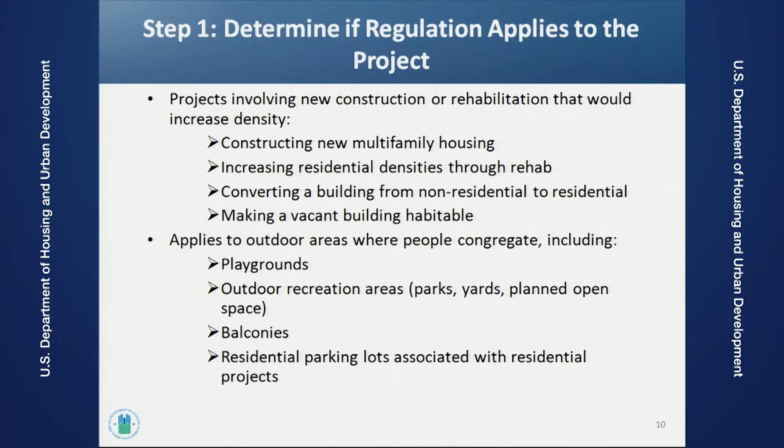What we're trying to do is protect people not only within the homes but in outside areas as well. We're concerned about children on playgrounds, people making use of outdoor recreation areas such as parks and open space. We want to protect people that are outside on their balconies and in the parking lots of the buildings.

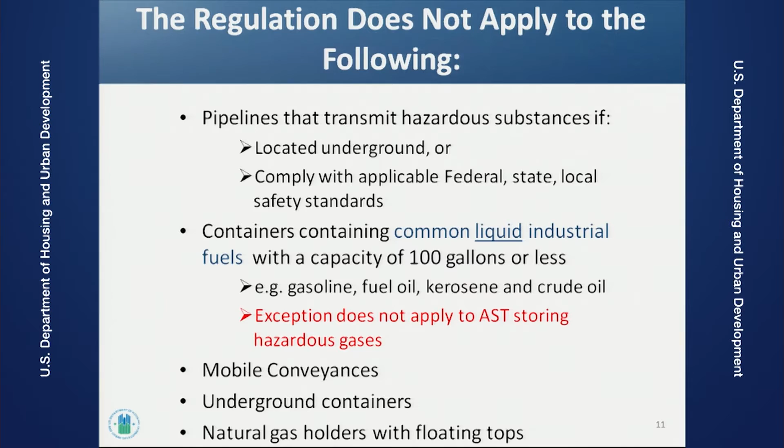The regulation doesn't apply to pipelines that are flammable and explosive if they're located underground or if they comply with applicable state, federal, and local safety standards. They don't apply to tanks that are 100 gallons or less that contain common liquid industrial fuels. Make note, this is liquid fuels. They don't apply to mobile conveyances, underground containers, or natural gas holders with floating tops. So if your project involves any of these things, then you don't need to comply further with this regulation.

So the second step is, if your project is the type of project where consideration of explosive and flammable hazards is required, you need to determine if there are above ground storage tanks within a mile of your property. A lot of times the Phase 1 environmental site assessment will identify above ground storage tanks. You can look on Google Earth. That's what I've used a lot, since a lot of times I'm doing a desk review of a project site.

You need to drive around the area yourself when you're doing your HUD site visit to make sure there aren't any above ground storage tanks, and if you look at this picture on the right, it looks kind of normal, and then you look in the back and you see two big crude oil storage tanks in the background. That's the kind of thing you need to keep your eyes open for.

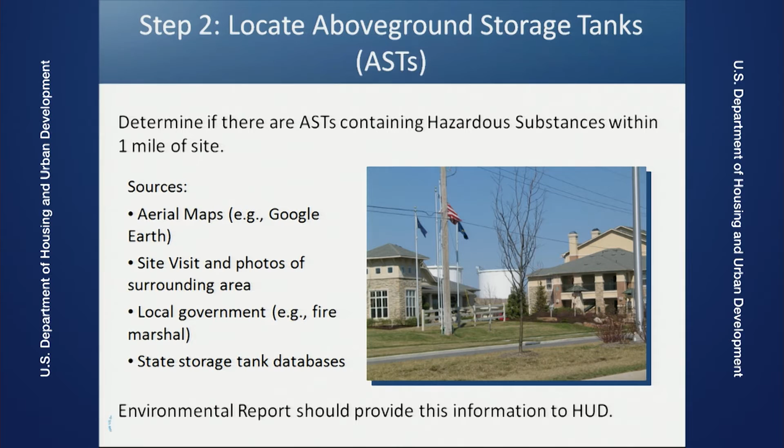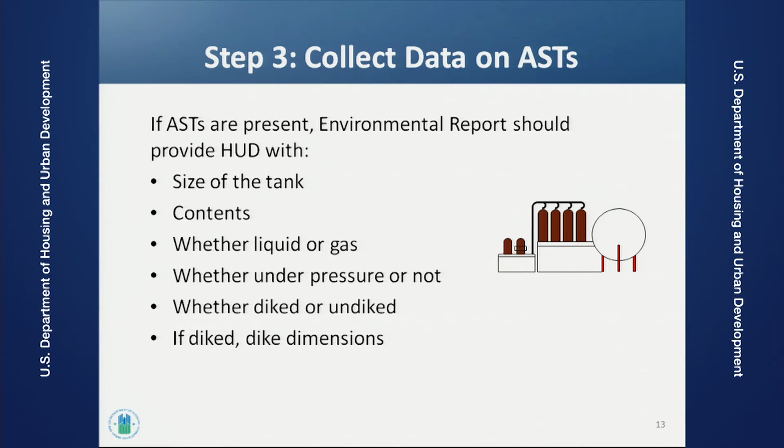And then one of the best places to get information about storage tanks are the state databases. I don't think every state has this, but many do, and they're usually very good sources of information about above ground storage tanks. If you do find that your project is within a mile of an above ground storage tank, you need to find out more about the tanks. You need to find out their size, what's in them, whether what's in them is a liquid or a gas, whether they're under pressure or not, and whether they have a dike. If they do have a dike, then you need to know the dike dimensions, because you'll need all of this to be able to calculate the acceptable separation distance.

One of the best data sources is to go to the company that owns the tanks. They're usually very happy to help and give you the information. The fire department or hazmat organizations can provide the information. The planning department and the Phase 1s can also provide some information.

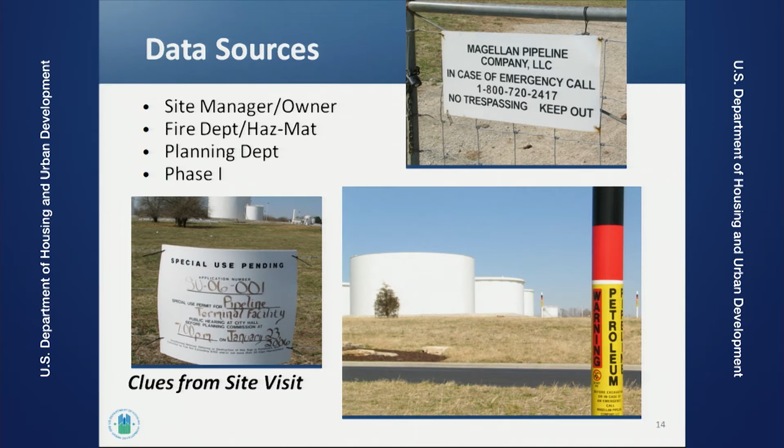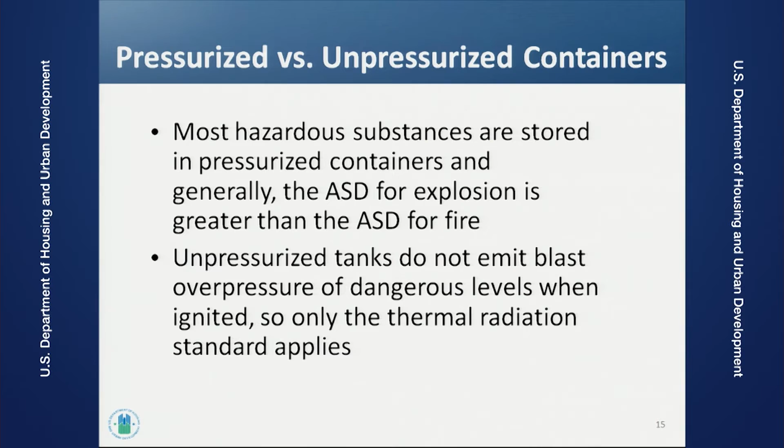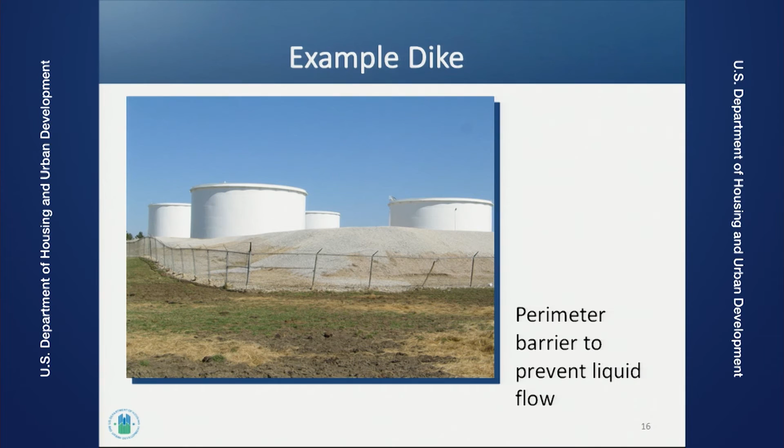So if you've got your tank identified, you know how far it is, you know what the contents and all the parameters are of the tank itself, then you need to determine the acceptable separation distance for that site. We have an ASD assessment tool on our HUD Exchange, and once you've got all the information, all you have to do is plug it into our tool. You would include whether the tank is above ground, whether it's under pressure, if it's diked, and if it's diked, what the dimensions are. And then it automatically calculates the ASD for you. And in looking at the acceptable separation distance, because there are two standards, one for explosion and one for thermal, we use the greater distance to determine compliance.

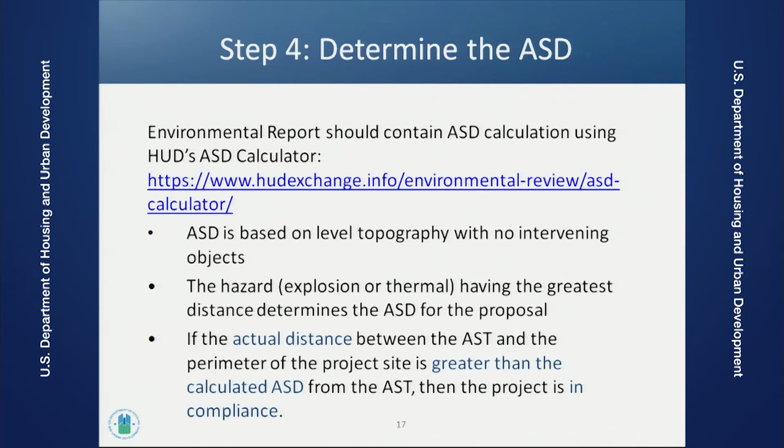When we're determining compliance, what we're looking for is, once we've completed the acceptable separation distance, we want to make sure that the distance from the nearest tank to the project perimeter is greater than that distance. If it's not, then the project is located in the danger zone.

And certainly in these cases, the technical support folks really need to be involved in this type of scenario. And really, you have two choices when you're dealing with a project that's within the danger zone for an above-ground storage tank, and that is to reject the project or find a mitigation measure that will prevent the risk.

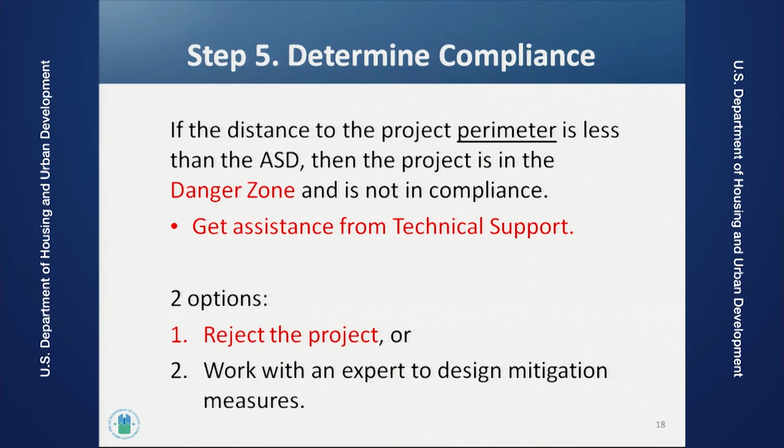What we need for the environmental review record, these are the documents that you'll be uploading into HEROS, is some sort of written documentation to show the presence or absence of tanks within 1 mile of the project. If you have a tank that's within 1 mile of the project, then you need to include your ASD calculation and the data that you used to make the calculations.

We always like to see a Google Earth map with the distance from the center of the nearest tank to the project perimeter noted on that map. And so we can show that the project is or is not within the ASD. If there is a mitigation required, you need to include the engineering report.

And as we stated before, you need to make sure that if there's any mitigation required for this type of impact, that is well documented and conveys further into the environmental review documentation as well as the closing documentation.

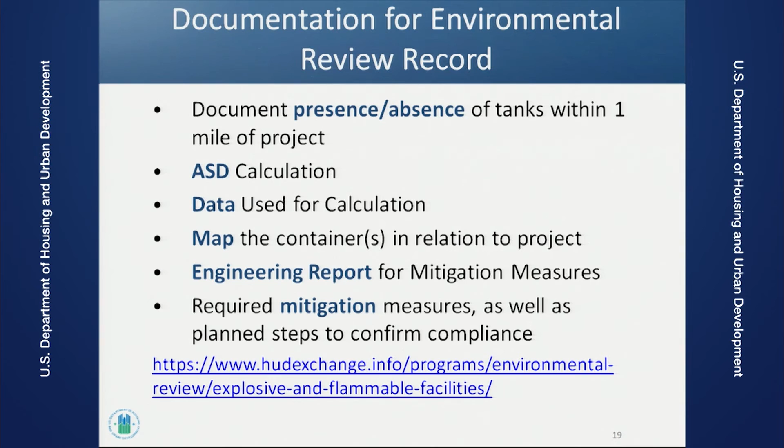HUD has a really great guidebook, Siting of HUD-Assisted Projects Near Hazardous Facilities. You can find that on the HUD Exchange at this link. It really has all the details on all the science behind the standard that we have. So I think that's it.